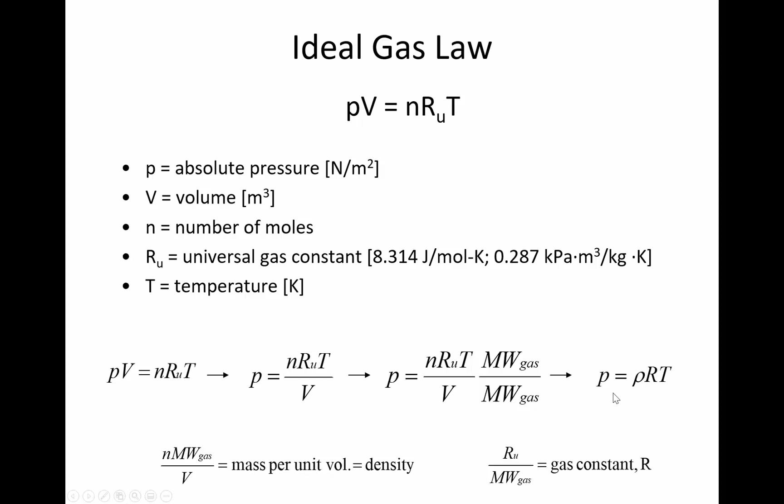So the usable form of this equation that we're going to be really applying is the pressure will be determined by the density times the gas constant R, that's not the same as R sub U. The R is for whatever that gas is, whether it be oxygen or helium or hydrogen, and then the temperature, still in absolute terms.

So just to get some practice with that equation, let's take a look at this example where we have a room, and it's a rectangularly shaped room with the dimensions 4 meters by 5 by 6. And what we know is the pressure of the gas in that room, 100 kilopascals. That's very close to our typical atmospheric pressure. The typical standard pressure at sea level is 101.3 kilopascals. So this would be the typical pressure just slightly above sea level.

And 25 Celsius is a pretty typical temperature, maybe a little bit warmer than the temperature in your home, but not way off the charts. And so what we want to do is find out for air. Air, of course, is a mixture of gases. It's a mixture of mostly nitrogen, a big portion of oxygen, and then trace amounts of other gases like helium, hydrogen, carbon dioxide, and so on. So the R value for that mixture of gas is given here, 287. That's the R value that's specific to air.

So let's go through the three things we want to know in this example. First is the gas's density. And so here's the formula for determining the density. The specific gravity, now SG is a term that was defined last week, and I'm not going to tell you again what that is, not right now.

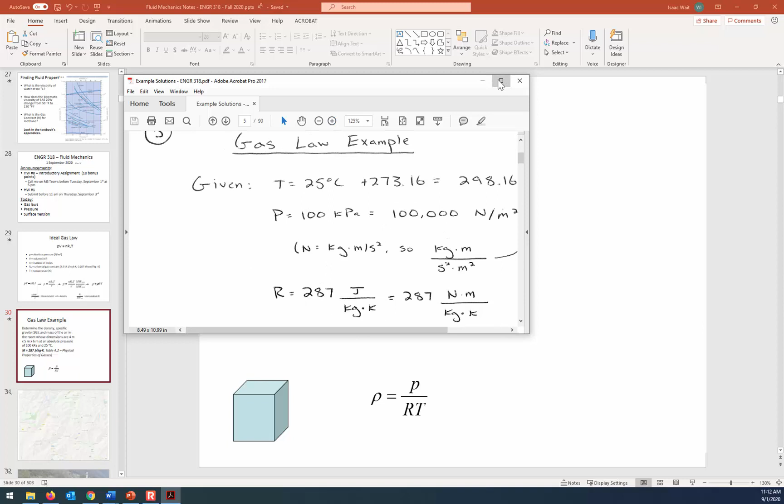And so I just wanted to show you why, in this list of all of the options, we choose 287 joules per kilogram Kelvin. So before I turn you loose to try some of these calculations, I just wanted to show you, if we expand out the units of 287 joules per kilogram Kelvin, what does that actually mean? Well, let me make this a little, oh no, I don't want you to see the answer yet. Alright, so looking at the units, 287 joules per kilogram Kelvin.

A joule expands out to a Newton meter. A Newton of force exerted over a meter of distance is a joule. And we can further break down a Newton into its components. A Newton is a kilogram meter per second squared. You can see that here where it's N, I've expanded that out to kilogram meter per second squared. And then this meter is from the previous step, and the kilogram and the Kelvin are carried over. So when we cancel out all the common units, the units of joules per kilogram Kelvin actually are meter squared divided by second squared times Kelvin.

So this is substituted into the formula that we're going to be applying. If we use those units and substitute them in here, you're going to see that you end up with kilograms per cubic meter. So if you've printed off the notes, for now, just write down meter squared divided by second squared times Kelvin, and then you'll see how it all cancels out. All right, so I'm going to pause for a moment so that you can calculate these three things: the density of the air at these conditions, the specific gravity, and hopefully you remember what we mean by specific gravity, and then finally, what's the mass of air in the room.

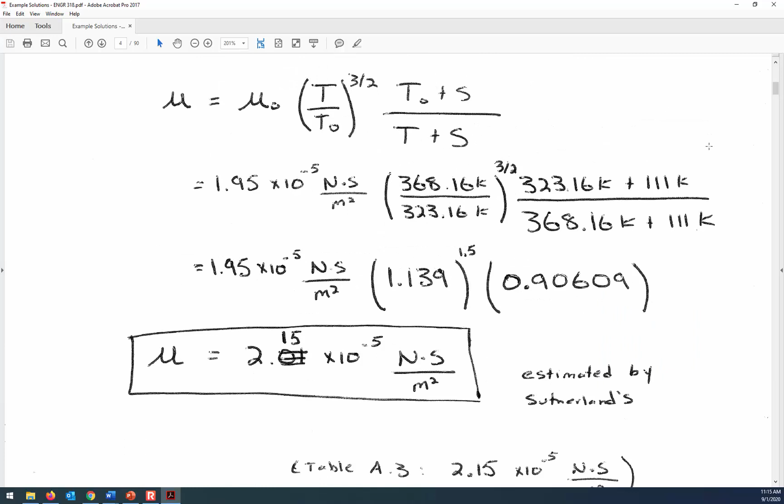In with the correct answer to the density. So let's see if we all agree what we should do to calculate the density with that formula. Oh God, that's too much. Alright, so here's the formula that we're substituting into. Density is pressure divided by the R for that particular gas multiplied by temperature in absolute terms. How do we know to use Kelvin? Because we're going to be multiplying it by this R value that has Kelvin units of temperature. If we left it as Celsius, it wouldn't cancel out. That's why it's a good thing to always write the units as you're doing your calculations.

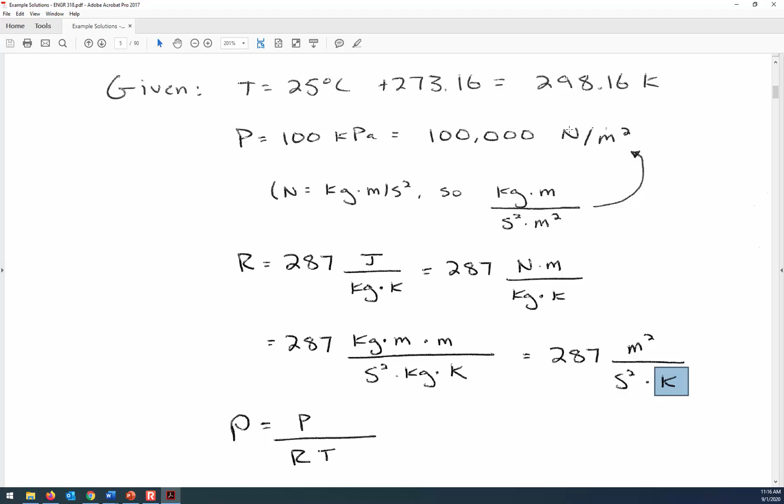So here on the screen you can see that the pressure is 100,000. Now 100,000 newtons per meter squared, if you expand out, a newton is a kilogram meter per second squared. So 100,000 newtons per meter squared is the same as 100,000 kilograms divided by second squared times meters. And then we have the R values, where we previously detailed how we got the units. So when everything cancels out, we're left with kilograms per cubic meter. And so the density is 1.169 kilograms per cubic meter. And if you open up your textbook, let me grab the book.

All right, so here's the textbook, and in Appendix A at the back of the book, it has the fluid properties. So here in Appendix A, it's got a bunch of properties for ideal gases, for air, for typical temp 15 degrees Celsius and 1 atmosphere. It tells us the density of air is 1.22 kilograms per cubic meter.

And so that's at a slightly different temperature. In the book, it's saying that's the temperature for 15 Celsius, and this example is at 25 Celsius. And so the density will vary slightly because of the different conditions. But it's always good to do a ballpark check to make sure that things are matching up the way you'd expect. All right, so that is the density.

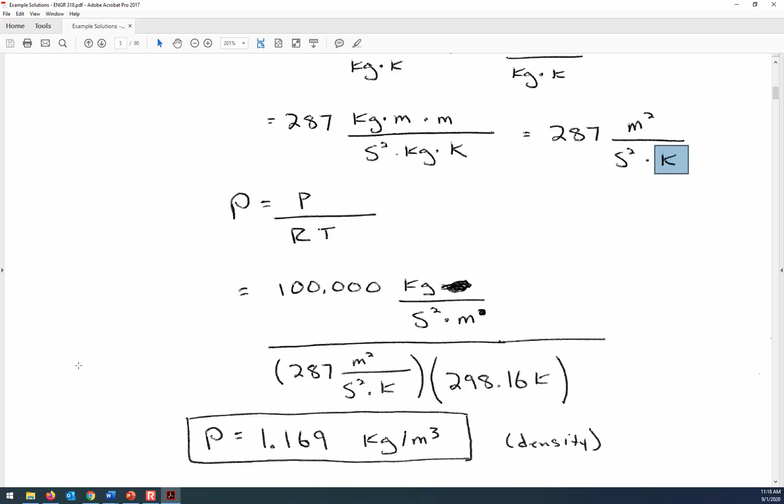Now, specific gravity. Do you remember what the definition of specific gravity is? Let's go back to the slide where that idea was introduced, just in case it has slipped your mind. Specific gravity is the ratio of the density of a fluid to the density of water. And Benjamin has correctly identified that we're going to take the density, which we already determined, and divide it by the density of water. So we take the 1.169 kilograms and divide that by 1,000 kilograms per cubic meter.

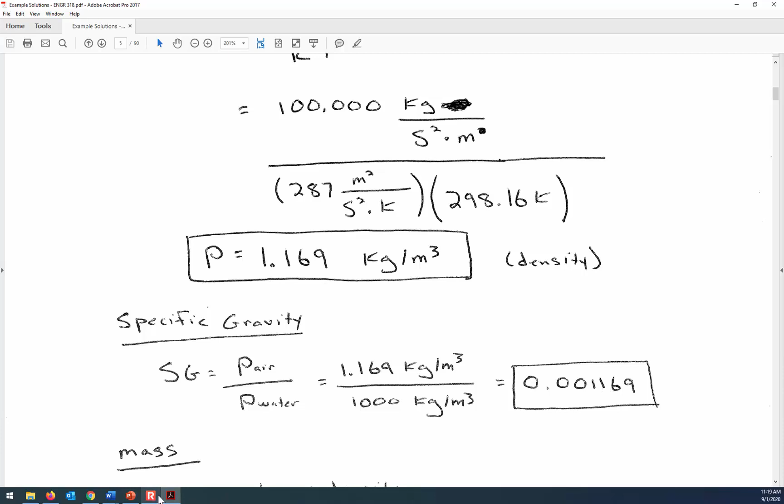So here is the specific gravity. So it's 0.001169, or in other words, 1.169 times 10 to the minus third. So that's specific gravity. And then finally, mass. How do we find the mass with density and volume? Mass is volume times density.

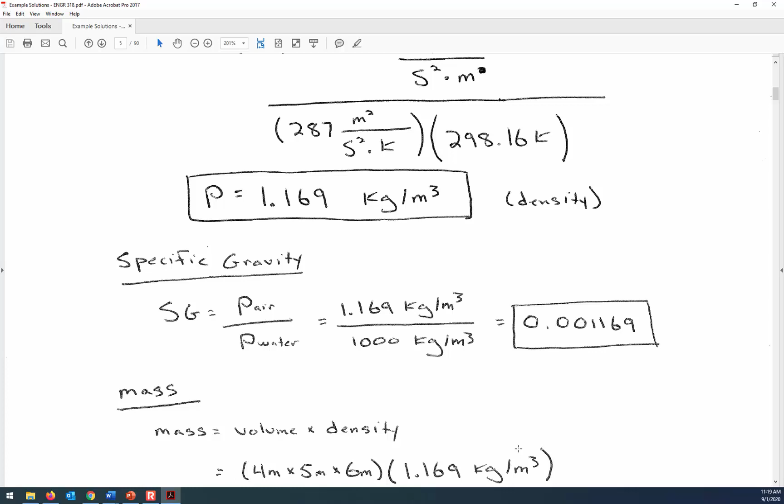So look at the units there. If we have the volume in cubic meters and multiply it by density, that's going to leave kilograms in the end. So if you don't know the formula for mass equals volume times density, you can always derive formulas like that just by looking at the units. If you know the density of the fluid, you can figure out how you're going to find mass just by looking at what's in the numerator, what's in the denominator, and prove it to yourself. So it's 140.3 kilograms of air is the solution to that one. So any questions so far on this example?

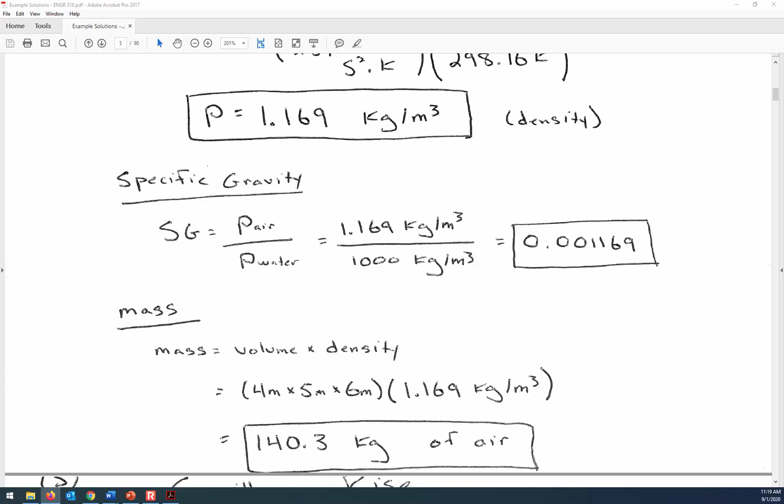See your conversion factor for your density that you used up top again? Yep. So this has how we took the joules per kilogram Kelvin to its base units, the base units that all other units are derived from: mass, length, time, and temperature. So here we have broken down the newtons into kilograms, mass, length, time, temperature. So breaking it down to the base units there, and then the same thing with the pressure.

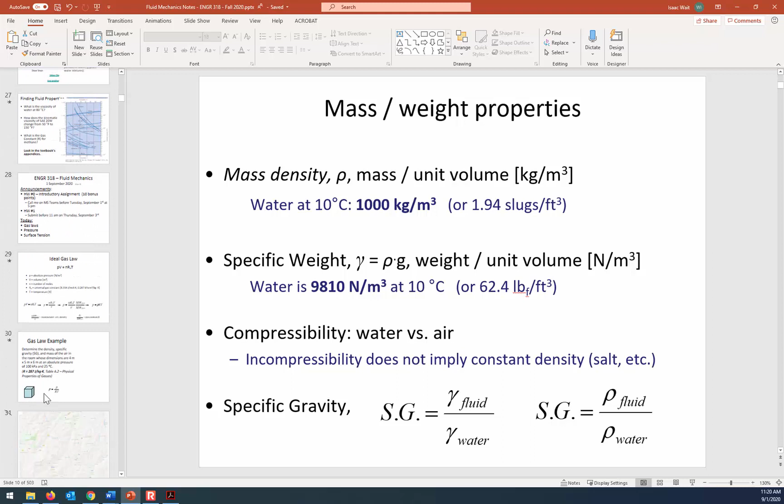All right, so let's now, after that first example, continue on and talk a little bit about pressure today. If you had a pound of water and you put it in a graduated cylinder like this, and let's say that the cross-sectional area of the cylinder is 1 square inch. So to get it to be 1 square inch, you could calculate the diameter. If area is 1 square inch and area is pi d squared divided by 4, then that means the diameter is going to be more than an inch.

The point is that the height of water, just based on the density of water and the amount of space that it occupies, a pound of water would rise to a height of 2.31 feet in a graduated cylinder that has a cross-sectional area of 1 square inch. And by cross-sectional area, what I mean is the bottom of it, the circular area is 1 square inch.

So sometimes when you are learning about units, it can be considered pretty typical to speak of pressure in an equivalent height of water. And so 1 psi, for example, is a pound of water on top of a square inch of area. So that's the definition of a pound per square inch. 1 psi is the force of the water above that area. So 1 pound of force above an inch squared.

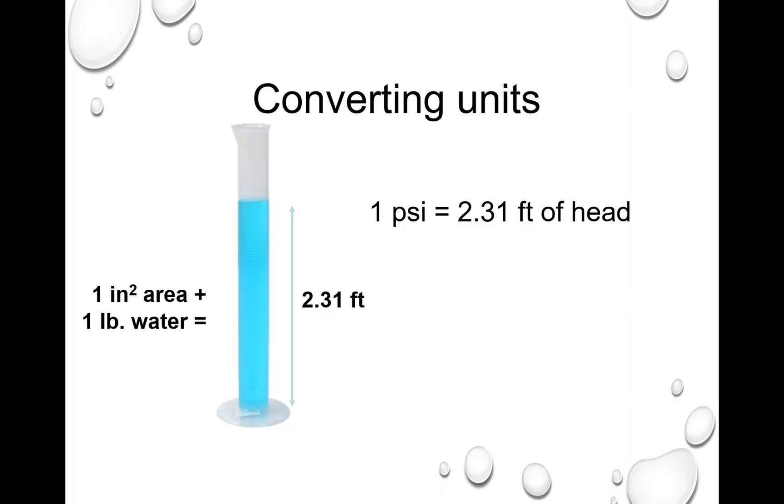Head is just an interesting term that's used to describe how high above a certain location the water rises. So head and pressure are sometimes used interchangeably, but I just wanted to introduce that idea that when we talk about pressure, it really does mean an amount of water above the surface, or it can be a gas as well.

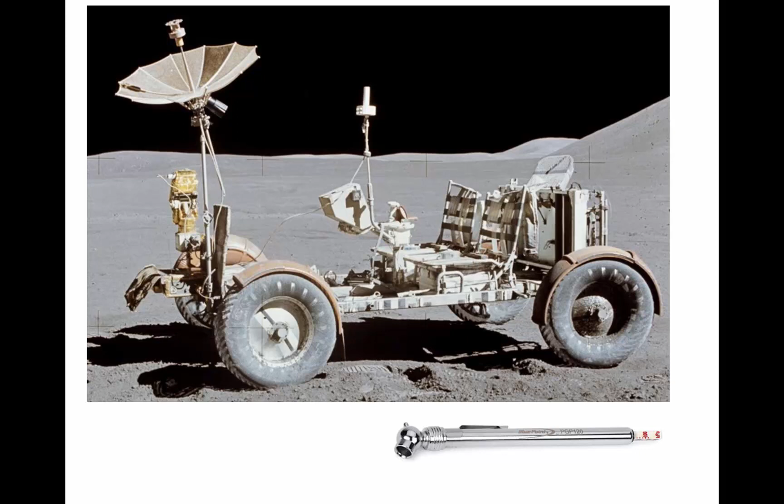Sometimes it's different. But in this case, they're saying, if you have one of these pressure gauges and you go to a gas station that has a compressor, you should fill up the tires until the gauge is reading 45 psi. So that's simple enough. But what if you were measuring the pressure of tires on the moon rather than tires on Earth? Things would be a little bit different.

So let's say this rover in particular, you can tell that the tires are inflated. But what if we took this rover back to Earth and we measured what is the tire pressure? Would we get the same measurement on the moon as we would on the Earth? Anyone want to guess that? Would you have the same pressure? No. Zach and Reagan both say no. Why is it that the pressure would be different? Gavin is saying it would be higher on Earth.

I actually disagree. I think that the pressure gauge would measure higher in space. And the reason why is that when you're measuring the pressure here on Earth, this gauge is measuring the difference between the pressure on the inside of the tire and the pressure of the outside of the tire. Because right now on Earth, there is gas pressure surrounding us. And so on Earth, it's measuring the difference between atmospheric and the pressure inside the tire.

And so in space, assuming that the temperature issue isn't the main reason, because it is colder in space, let's assume that it's just about the difference in the pressure of the surrounding gases. Well, in space, there isn't an atmosphere. And so you're measuring the difference from vacuum to the pressure in the tires. There's a little illustration I'll show you in a moment, but we have to define some terms to really understand the different ways that we measure pressure.

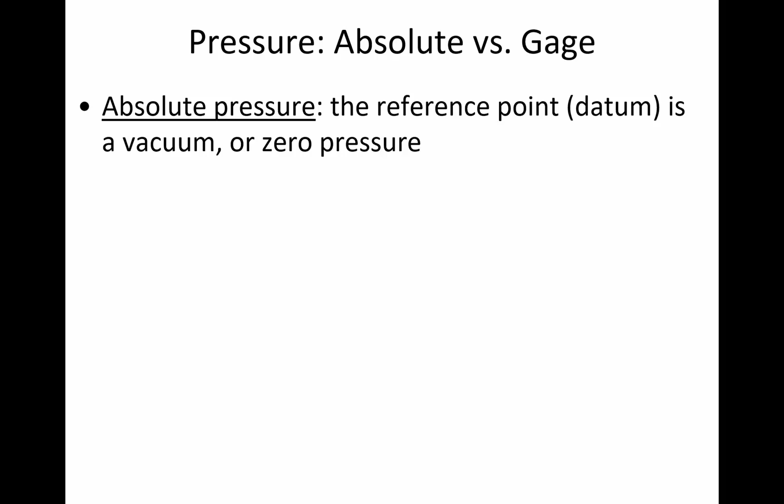Sometimes we measure pressure on an absolute basis, meaning that our reference point is no gas and no pressure. The reference point is sometimes called a datum. It's a basis point for measurement. And absolute pressure is that you're using vacuum as the starting point. You're saying 0 is space. And in Huntington, the absolute pressure of the atmosphere is 101 kilopascals, and so that's the atmospheric pressure. And so my tires, in absolute terms, are going to be 335 kilopascals, because in absolute terms I would have to add the measured pressure to the atmospheric pressure. And so ABS, that subscript, means the absolute pressure of this thing that we're measuring.

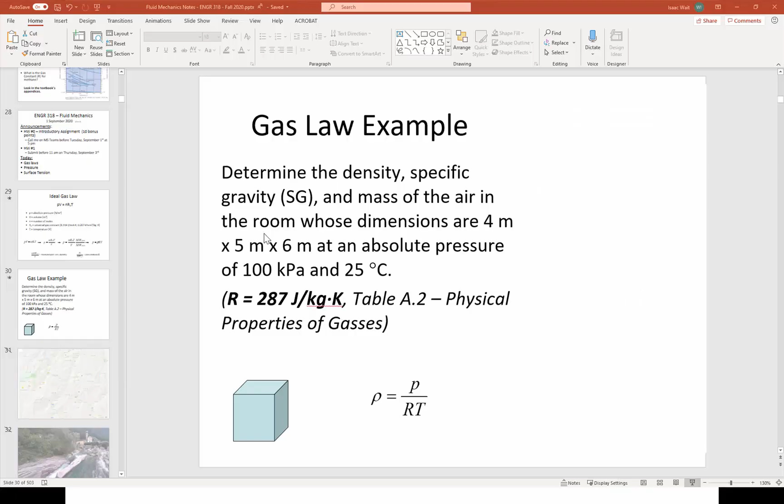Gauge pressure, on the other hand, is when you are saying, let's make the datum, that reference point, be the atmosphere that surrounds us, rather than 0 pressure. And so the pressure gauge, when it says 0, like if you were at Sheetz right now filling up your tires, and it said 0, that doesn't actually mean that there's a vacuum inside your tires. It just means that it's the same pressure as the atmosphere. And so it's what is the 0 point.

And in the case of gauge, we're just saying, let's assume that our 0 point is the atmosphere that surrounds us, and then we'll just measure pressure beyond that. So this illustration is saying, what is your basis point? What is the reference that you're going to be measuring all of the pressures from? Do you want to know how much is the pressure beyond atmospheric, or do you want to know how much pressure is there in your tires beyond vacuum?

Now the distance between those two datums is 101 kilopascals, and so my tires, if I measure from the atmosphere as the reference point, that's the gauge pressure of 234 kilopascals. But if I'm measuring starting from the vacuum, meaning no molecules, no pressure, then the absolute pressure of my tires is 335.

Zach asks, is absolute pressure actually relevant? It is when we're doing gas law calculations.

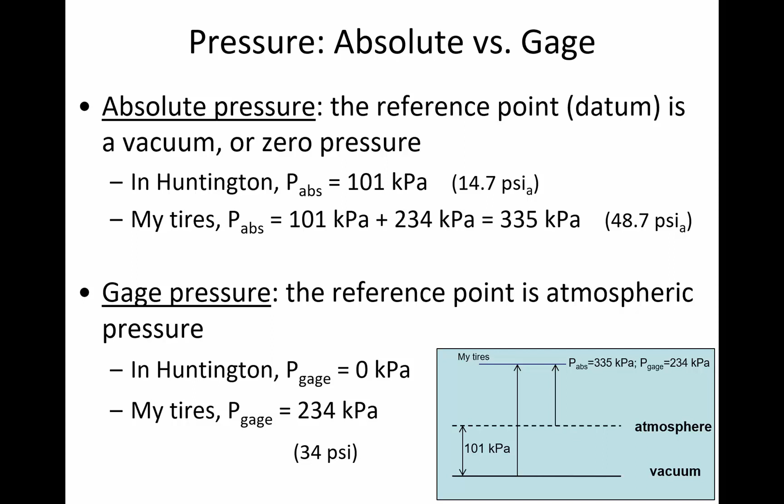Okay, so just to try out some more gas law calculations, let's say that we have a known volume of oxygen. It's a cylinder that has a volume of 2.5 cubic meters, and we pressurize it to a known pressure, so that's 7650 kilopascals, and that's the absolute pressure. And the materials themselves have a mass of 50 kilograms, and then the temperature of the gas is 120 degrees Celsius. And we want to know what's the total weight of the gas and the tank together.

And same as before, joules per kilogram Kelvin is going to be what we can substitute directly into this equation, because the real units of joules per kilogram Kelvin is meter squared divided by second squared times Kelvin. So that'll be the correct units. But what we have to do is convert from kilopascals. When you put it into this formula for density, you need to convert from kilopascals to newtons per meter squared. 1 kilopascal means 1,000 pascals, and the pascal is the same thing as a newton per meter squared.

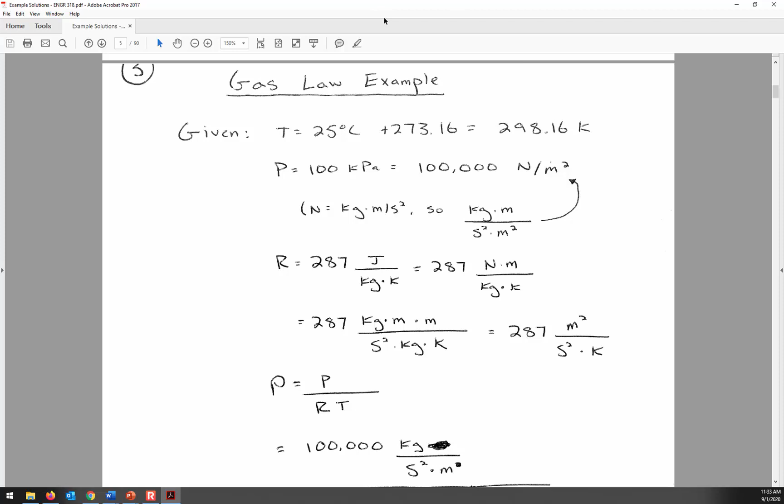Alright, let's look here at what is going on. The given data that we've got is the volume of the tank, the absolute pressure is known, the mass of the tank, the temperature, the R value, and that R value is the R value that's specific to this. What's the tank filled with? Does it just say it's air or is it oxygen? Alright, yeah, that's the R value for oxygen. Okay. And then you can see that I've converted the temperature over to Kelvin.

So to calculate the density, we just substitute in the pressure, converting it from kilopascals into pascals, and a pascal is the same thing as a newton per meter squared. So 74.9 kilograms per cubic meter.

Now, what we saw from a typical uncompressed pressure of gas was that the density was around like 1.2 kilograms per cubic meter. And so here, why is there such a higher density of the gas? Well, it's because this exists at a much greater pressure than the 100 kilopascals in the previous example. So you always want to just do a sanity check, as they say, or make sure that the numbers are qualitatively headed in the direction that you'd expect, and here they are.

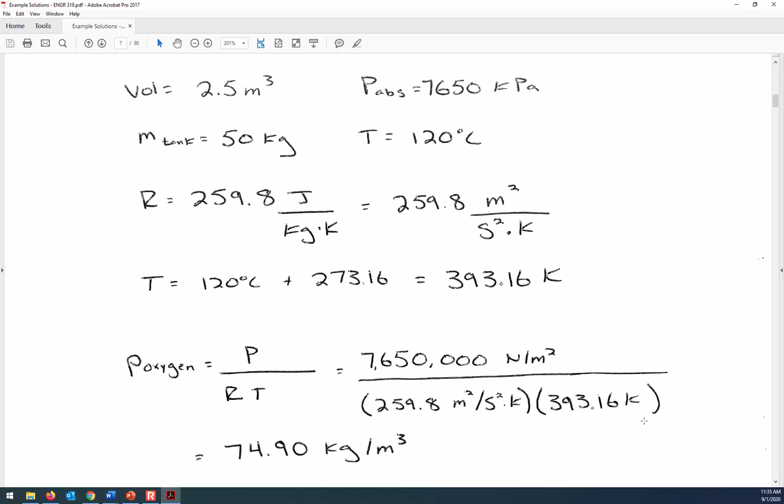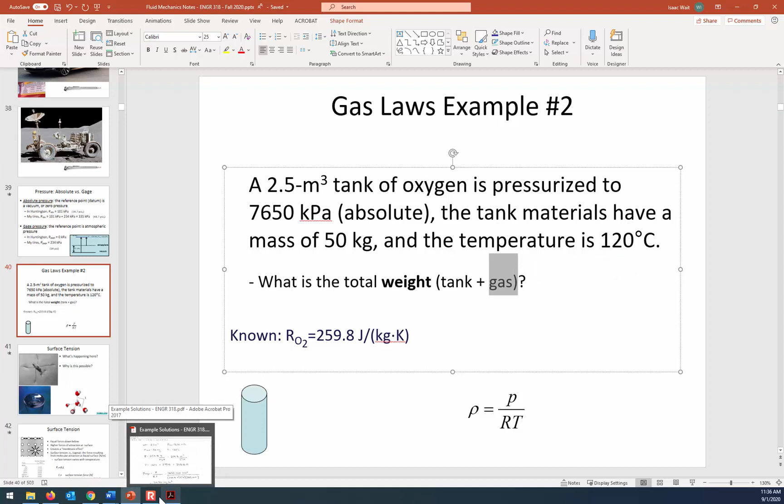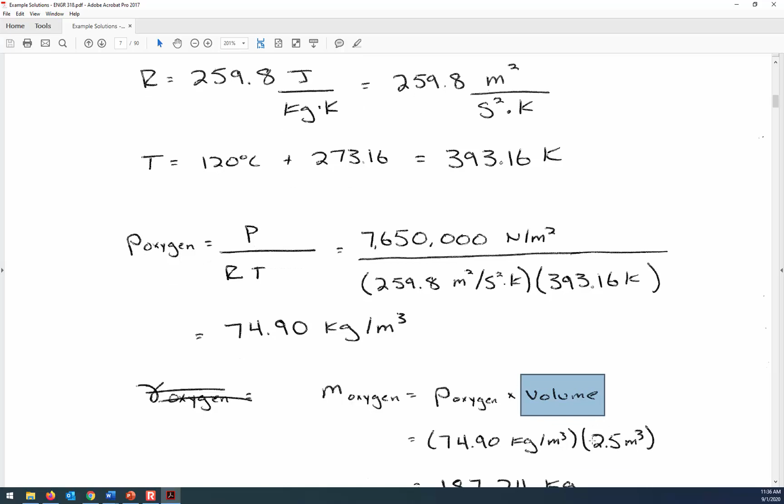So we have the density of the oxygen, and now the next part of the problem asked us to determine the weight, meaning the force applied by the tank and the gas. So we need to find out the mass of oxygen that's there, and if we know the density, then we can calculate the mass of oxygen by multiplying the density that's known for the oxygen and the volume that oxygen occupies. And so you should calculate that the mass of the oxygen is 187.2 kilograms. And so then the combined mass of the tank and the oxygen together is 237 kilograms.

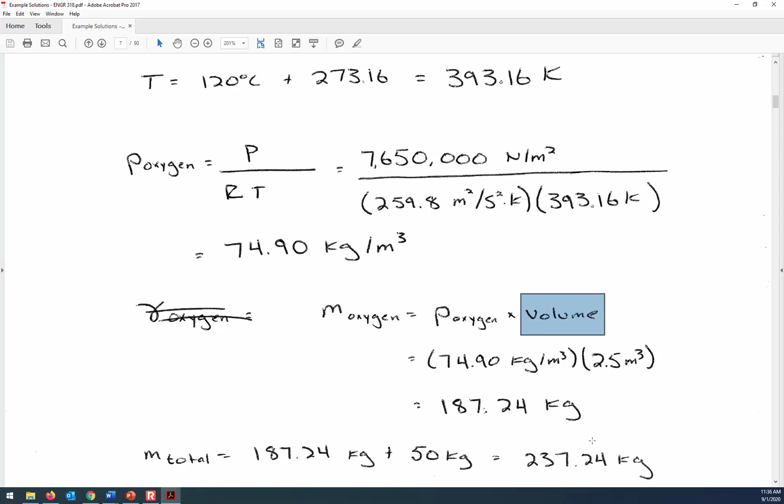And finally, converting that over into the weight, we have to multiply by g. Weight is mass times gravity. So weight is going to be 2327 newtons. All right. So that's another illustration of how these gas laws can be used to interchangeably determine the mass or the pressure or the volume by making use of that gas constant.

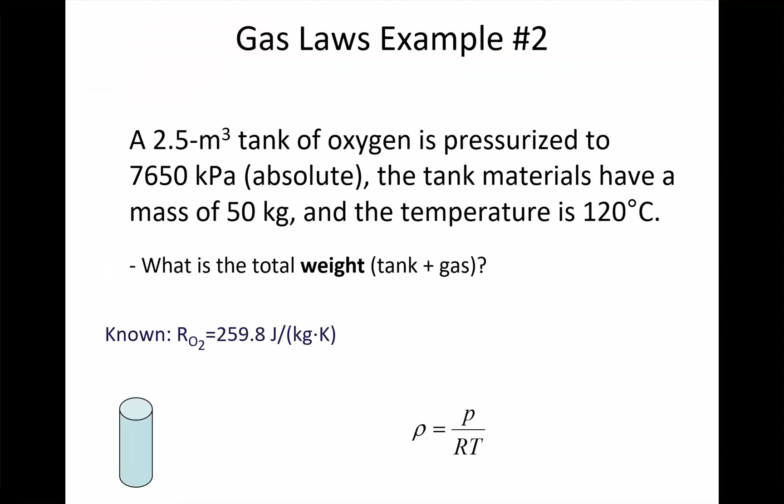In general, if we're doing a force balance, then we can say that the downward forces, meaning the combined mass and gravity effect of this bug, is less than whatever is supporting it. And what's supporting it, the force that is resisting the downward forces, is something that we're going to call surface tension.

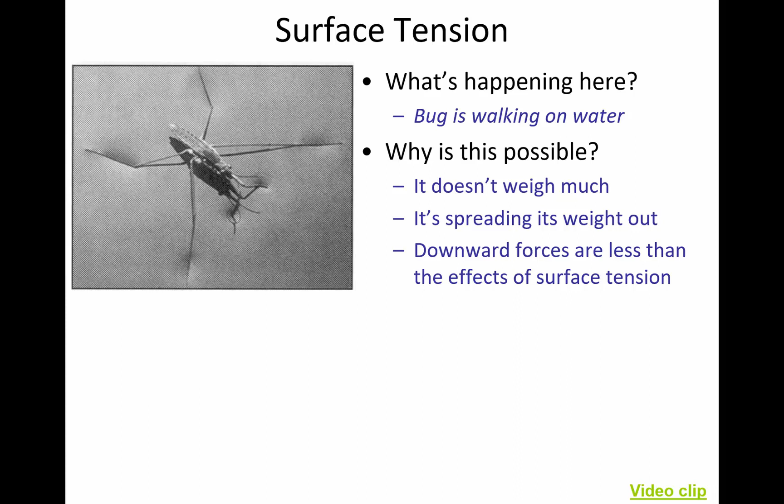And let's take a quick look at a little video clip that illustrates this same effect on a larger scale. Rather than a bug, it's actually a lizard that's able to do something similar.

Oh, I didn't want to do that. I just closed my presentation and opened it again.

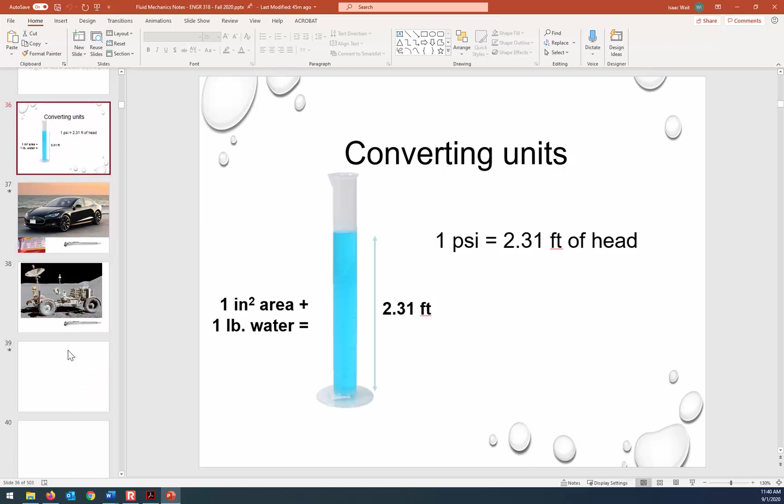All right, so this surface tension effect, you can see it with bugs or lizards walking on water. You can see the picture here of a paper clip floating on top of the water. We're going to actually see that in the lab today and tomorrow.

By the way, on the subject of the lab, there's about 10 mechanical engineering students in the class this semester. You're welcome to attend the lab. You're not enrolled in the lab because mechanical students don't take 319 any longer. They've got a combined lab with another course. But if you want to see the demonstrations and observe some of the phenomena that the civil engineering students are going to be seeing, you don't have to enroll in the course. You can just show up for the lab and participate in the experiments and turn in a report if you want to, or don't turn in a report. It's entirely up to you.

But I just wanted to put the offer out there if you want to see, for example, today's demonstration, which is a paper clip floating on top of water. Jeremy asks the room and time. It's in room 1228 at 2 and 3 o'clock on Tuesdays and Wednesdays. So today and tomorrow, you could come at 2 or come at 3. And it's 1228 down on the ground floor of this engineering building.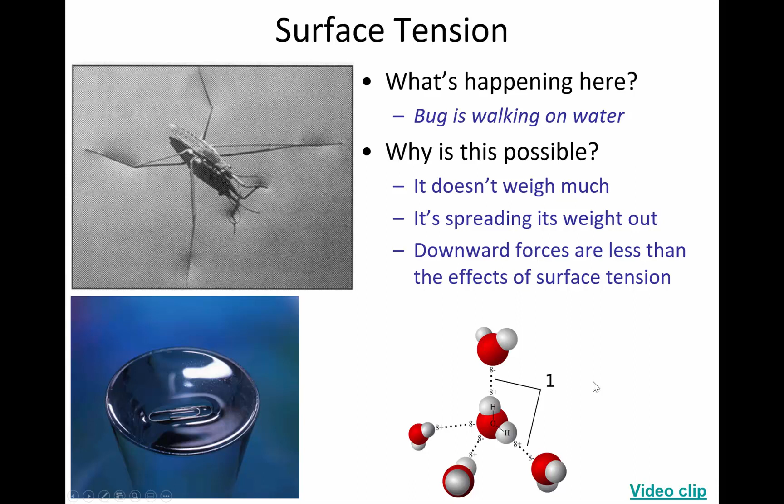Okay, so surface tension arises out of intermolecular forces. It's when water is attracted to itself. We know that water is a polar molecule, relatively negatively charged on the oxygen and relatively positively charged on the hydrogen. And so one water molecule will be weakly attracted to adjacent water molecules. And that causes a surface tension because at the top of the water, the attractive forces that the water molecules are experiencing are distributed over a smaller number of adjacent molecules.

Just as an illustration, this molecule that's below the surface is interacting with all of the adjacent molecules, the one to the left and to the right and above and below. But up at the surface, there are relatively fewer molecules for this water molecule to interact with because there's none above it. And so there's higher forces of attraction at the surface, simply because when you've got the layer of air on top, all of the attraction that would have been with the molecule above it is instead exerted on the molecules to the side. And so there is kind of a membrane effect at the top.

And different liquids are attracted at different amounts. The constant that allows us to characterize the strength of that attractive bond is called surface tension. Sigma has units of newtons per meter, and you can see that for water it varies as a function of temperature. At 20 degrees Celsius it's 0.073 newtons per meter. As you get warmer, that force is weaker.

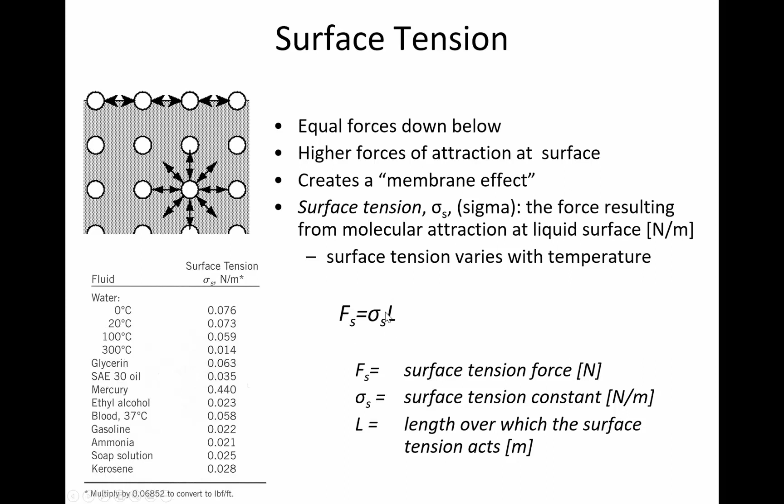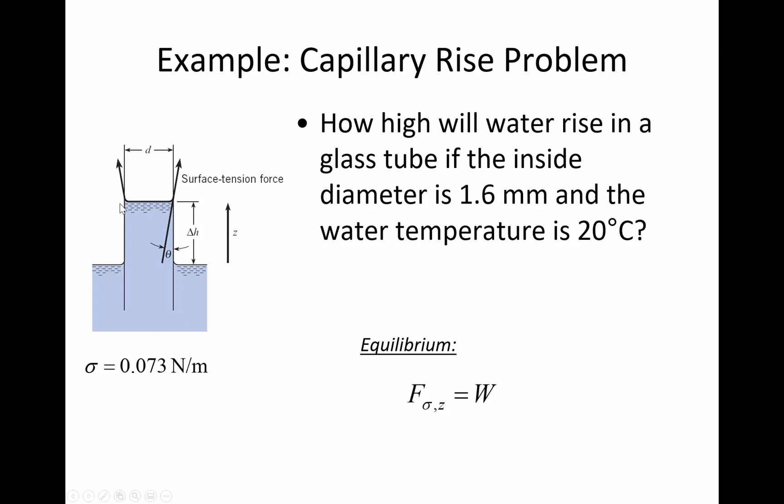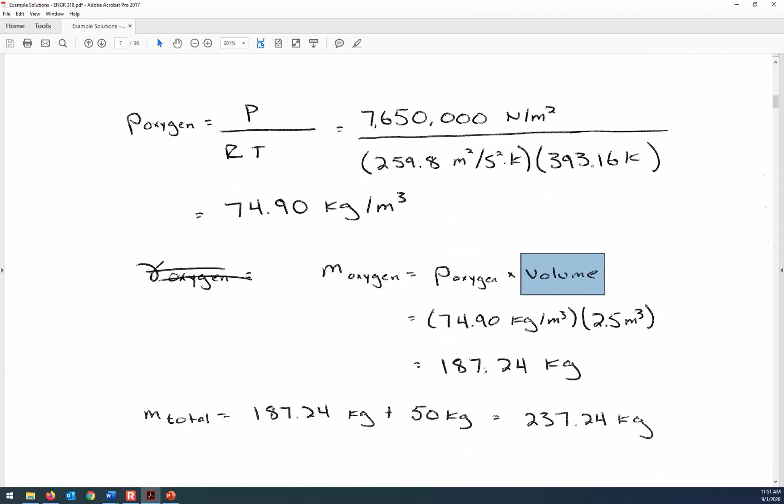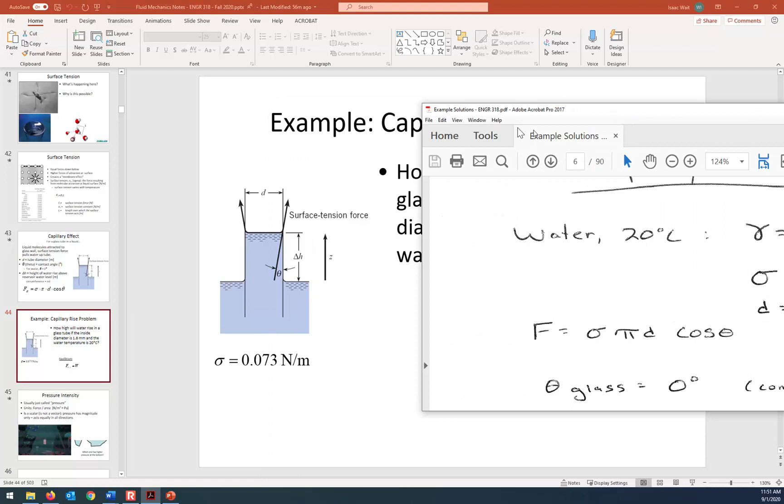Let me just give you kind of the initial hints, and then you can do the substitutions and the calculations if you haven't already started. Let me just show you how to do the initial setup of this one. Alright, so we start with the given details.

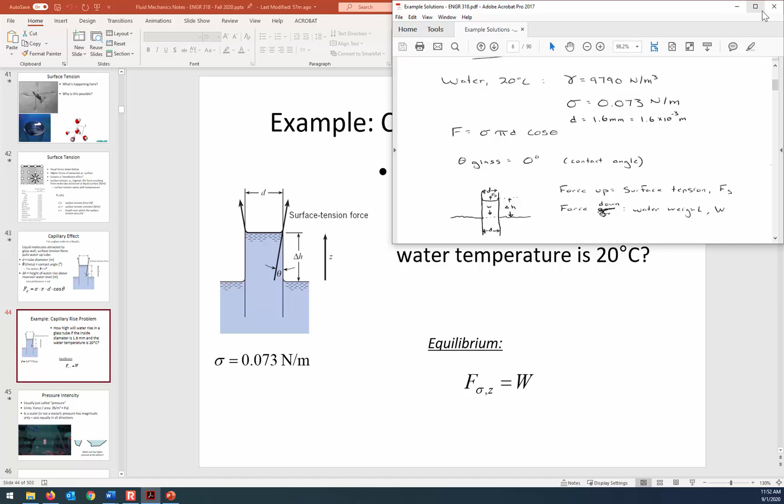It's like I've never clicked on a screen before. Gavin, you are off by a factor of 10, but I think you're headed in the right direction.

Okay, so here's the gamma of the fluid at 20 degrees Celsius, the unit weight of water, 9790 newtons per meter cubed. The surface tension of water at that temperature, and then if we convert the diameter from millimeters to meters, it's 1.6 times 10 to the minus 3 meters. Okay, so we're going to say that there's an equilibrium between the surface tension force, F sub s, and the weight of the water, which is acting downward.

So here I've done a little sketch, and I've identified we've got a diameter of the capillary tube, some unknown delta H that the water is going to rise to, and then the force acting down is the weight of the water, and what's drawing it up above the surrounding water line is the surface tension force. So why is the water rising? It's because it wants to get in contact with that glass tube. It wants to maximize the physical area of contact with the glass tube.

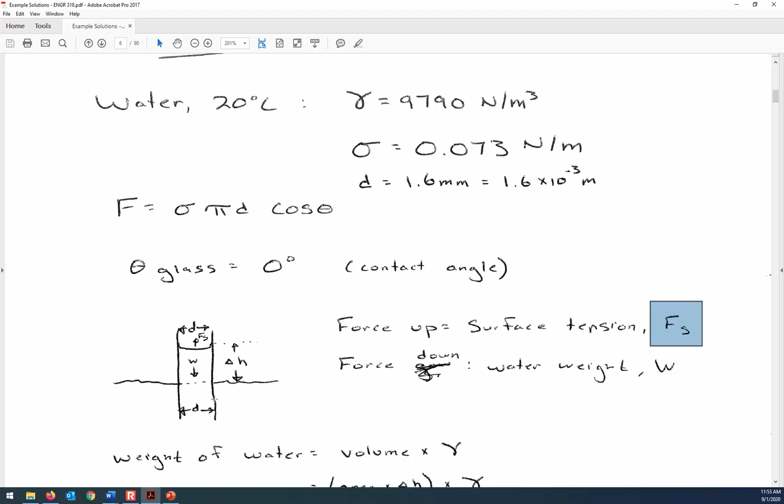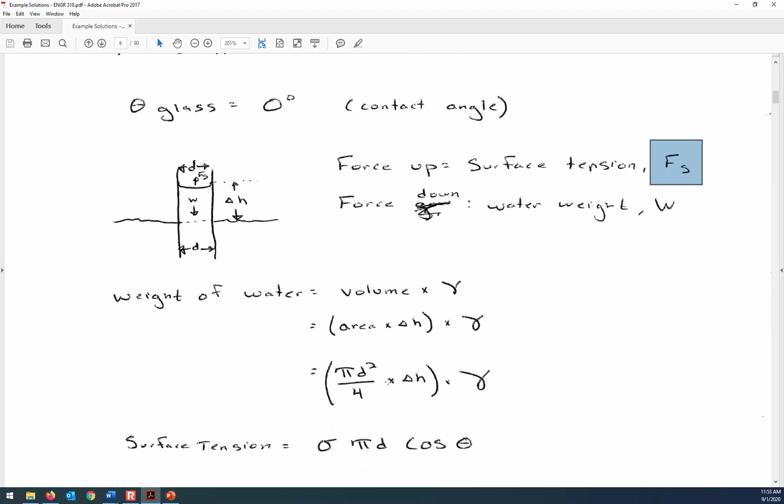So the weight of the water we can calculate as volume times gamma, and then the surface tension is going to be sigma times pi d cosine theta, where theta in this case for water is 0. So equilibrium means set these two equations equal to each other. The equation for the weight of the water on the right hand side, the surface tension on the left hand side, and the only variable that we don't have a number for is delta H.

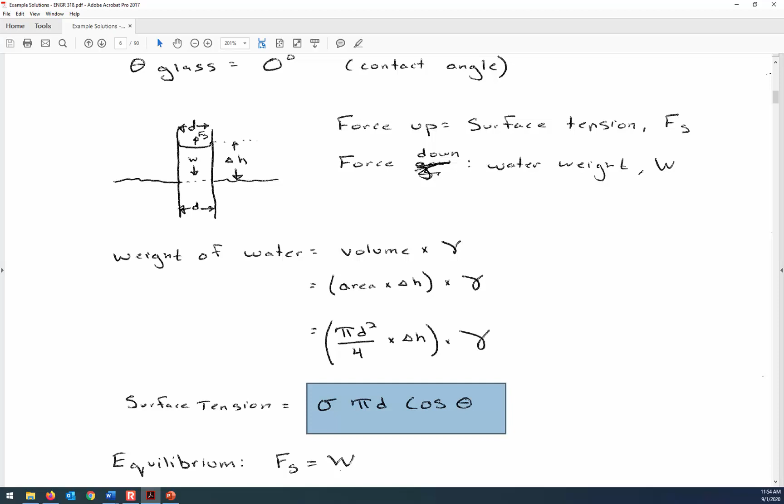So set them equal, substitute in all the values that we know, and the only unknown will be delta H, and that's what we're solving for, what's the height that the water level is going to rise to. So you can see that if you rearrange this expression to solve for the unknown delta H, so I have my equation for surface tension force. I have my equation for the weight of the water. Set them equal, and then rearrange to solve for delta H.

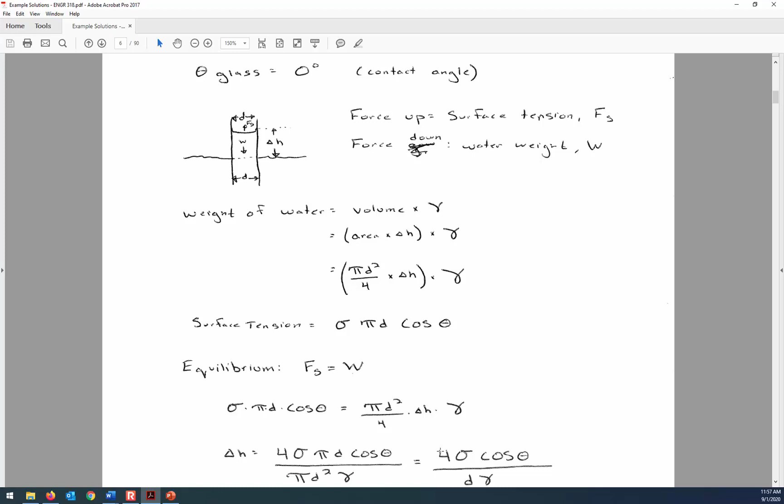So canceling out common terms, I'm going to have 4 times sigma multiplied by cosine of theta divided by d times gamma. And so we can substitute in all of the values that we know. The surface tension constant for water at 20 Celsius, 0.073 newtons per meter. The contact angle between water and glass is 0 degrees, so cosine of 0. The diameter of this glass tube, 1.6 times 10 to the minus third meters, and then the unit weight of water, 9790 newtons per meter cubed.

And so that gives us a distance of 0.0186 meters, and expressed in millimeters, because that's kind of small, it maybe doesn't seem like much, but the water is going to rise up to a height of 18.6 millimeters inside the glass tube.

So if you make the tube an even smaller diameter, then it would rise even higher. And the reason why is that when you make the diameter, let's say you cut the diameter in half. Well, if you cut the diameter in half, then you are going to be reducing the surface tension force, but you're going to be reducing the weight of the water even more dramatically.

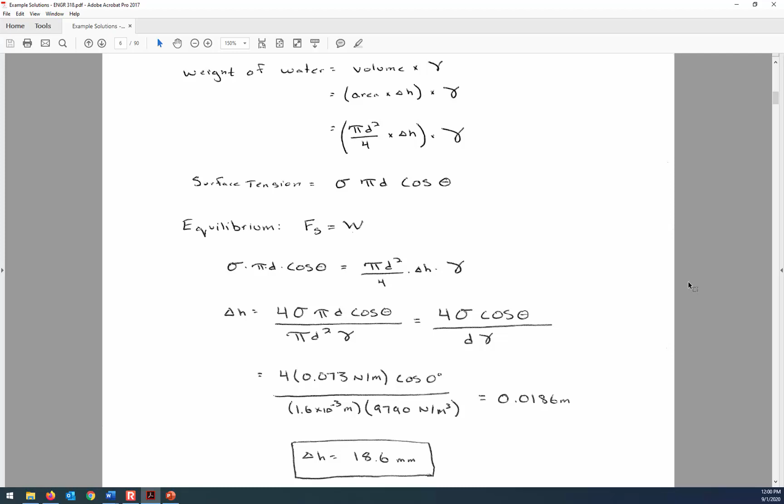And so you know that there's water underground, aquifers, and water will rise up through the soil using this capillary effect above the actual saturated zone. There's an increased water content in the zone of aeration because of the capillary effect. So this has some real-world applications, and it's an important concept to be able to understand capillary rise.

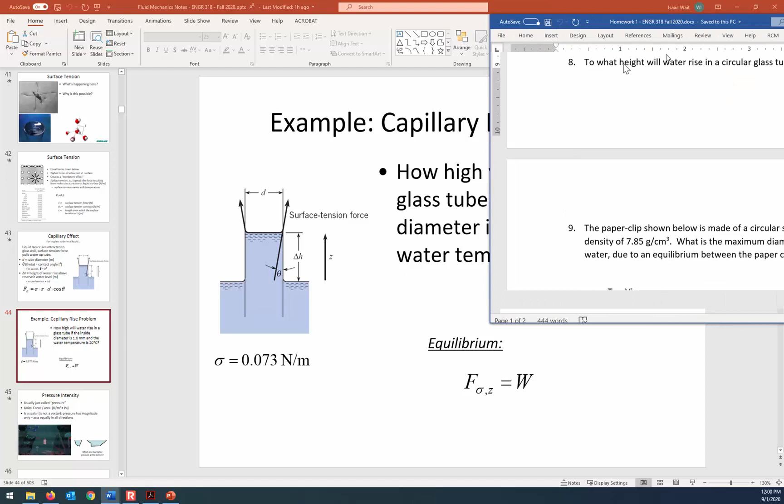Let's just take a quick look at the homework assignment, because I want to point out, I think one of the problems, maybe two of these problems, has to do with surface tension and capillary effects. And so the first problem that's related to this says, to what height will water rise in a circular glass tube with an inside diameter of 0.1 millimeters? Okay, well that's going to be pretty easy now that you've done an example that was nearly the same.

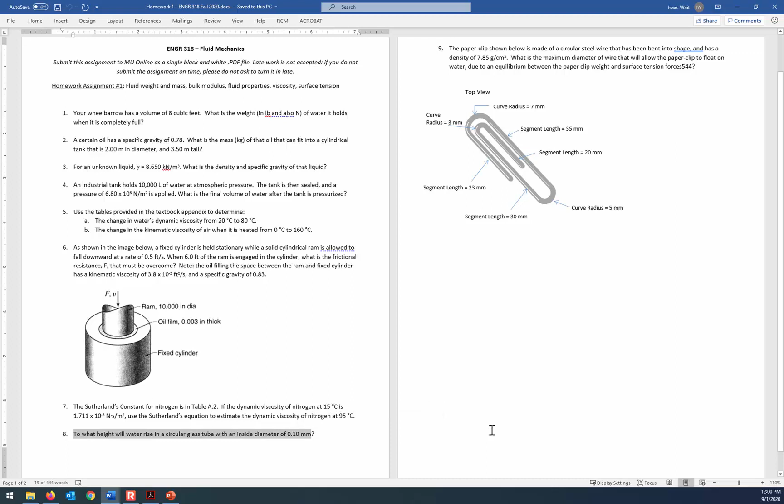Problem 9, though, is a related problem. Even though it doesn't seem like it's related, it is closely related to what we've just been talking about. So in this problem, it's going to be a paper clip that is floating on top of the water. And from the segment lengths and the density, you'll be able to find out the weight of the paper clip. I'm asking here the maximum diameter of wire that's allowable for it to float.

Because if it's a really small diameter wire, just like a tiny little thread of wire, then it can float on the water, no question, it's kind of obvious. But as the diameter gets bigger and bigger and bigger, it may not be able to float. And in the lab, we've got a paper clip that you have to be so careful with to get it to sit on top of the water. And then we have smaller paper clips that sit really easily on the water.

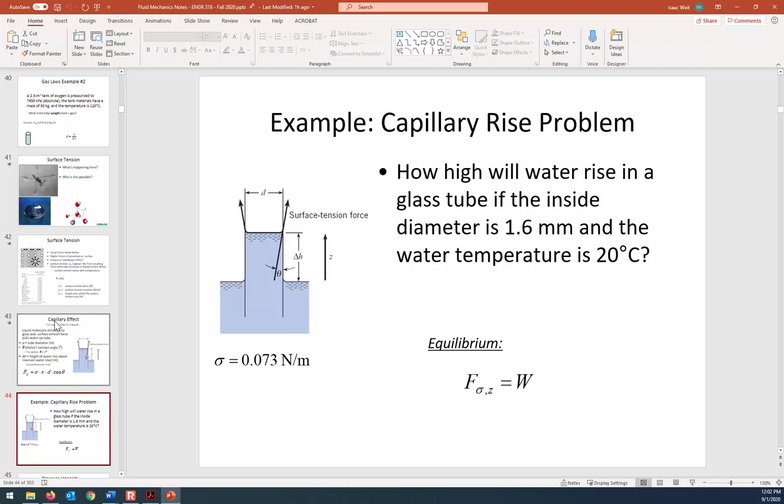So in this question, you're going to be putting into equilibrium the weight and the surface tension forces. But the formula for surface tension, if we go back to the general formula here, it's sigma pi d for a circular capillary tube, but here is the more general form of the surface tension formula. So this is the formula that you're going to use in question 9. You're setting two things in equilibrium, the weight of the paper clip and the surface tension of the water.

So the surface tension constant, sigma, is easy enough. It just says to float on water. They don't tell you any particular temperature, so just consider the typical 0.073 newtons per meter, like we did in the example. But now what about the length parameter? To find the surface tension force, you have to know the length. Now here's the key, the big hint that I'm giving you. The length is going to be both sides.

It's the left and the right side of the paper clip. So the paper clip interrupts the water in two different locations. And so the length is going to be the physical segment length that's described here. So for example, this segment of the paper clip where it says 23 millimeters, that's the physical length of the paper clip, but since it's on the left and the right of it that it's bending the water, it has a combined length of 46.

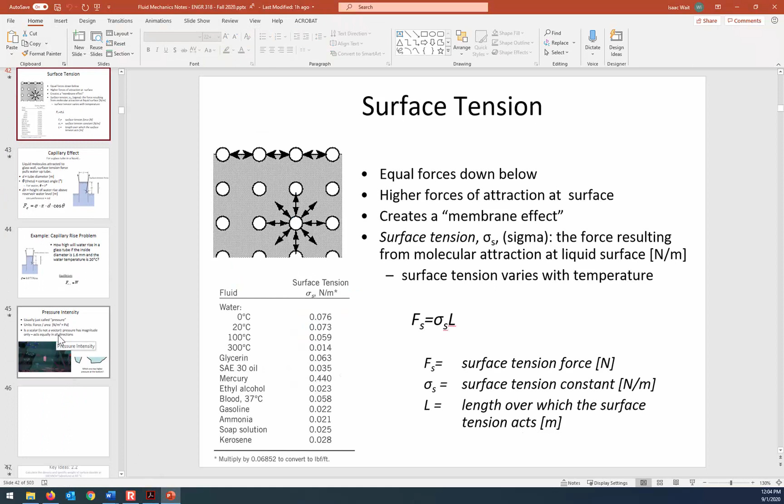So around the curve, it gives us the radiuses. The radiuses can be minimally different on the outside and the inside when we do that. How do you handle that? Well, you're absolutely right. It is going to be a little bit different. I think what you should do is just neglect the fact that they're different.

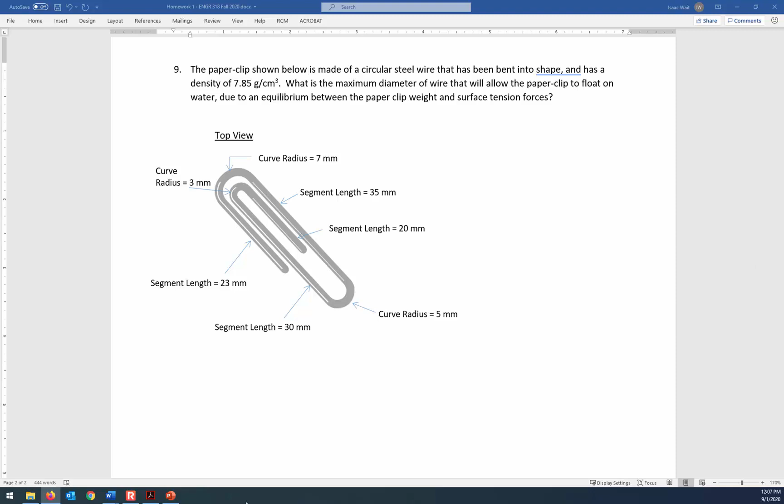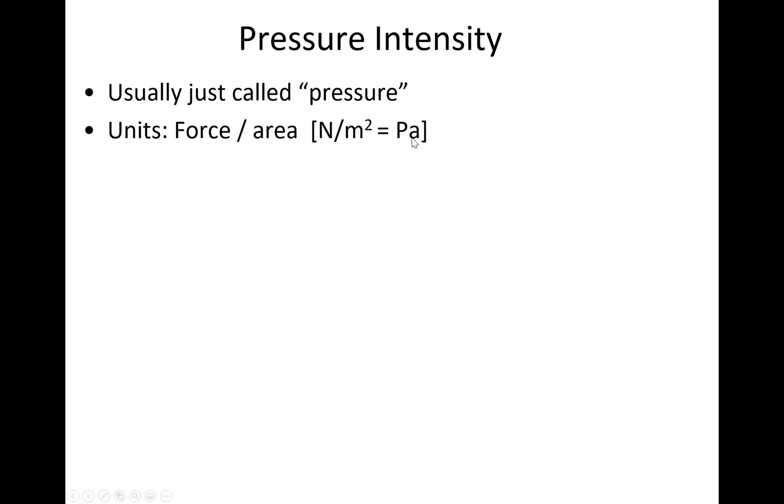Okay, pressure intensity is the magnitude of force exerted over an area, and a Pascal is a Newton of force exerted over a square meter of area. And it's a scalar, which means that the pressure has only magnitude. It's equal in all directions.

So that if you go down into the ocean and you turn your ears from side to side, it's not like you can avoid the pressure by pointing your face down at the pool or pointing your face upward. No matter what direction your ears are oriented, you're going to experience the same pressure regardless of your orientation. So it has magnitude but not direction.

And so, there are some places where people will go scuba diving, like in a very narrow but very deep kind of a pool. And it doesn't matter how wide the pool is, it only matters how deep the pool is to experience the pressure. So when we get together in class on Thursday, we're going to talk about the formulas that we use to calculate pressure. You've already got the sneak peek at that from our first lecture when we talked about Challenger Deep. But we'll continue talking more about pressure units in the lecture on Thursday.